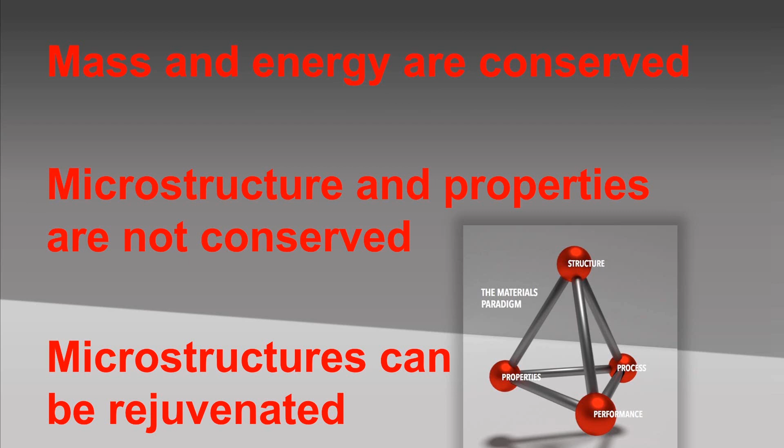Let me give you some examples for both direct and indirect sustainability effects. Direct sustainability effects refer to the reduction of emissions and energy consumption during the synthesis and manufacturing of metals. In that context, the reduction in the CO2 emissions, stemming from metallurgical processes, deserves highest attention.

A typical example is the current attempt to inject hydrogen gas into blast furnaces. The aim is to use hydrogen as reductant, so as to reduce the fraction of iron ore reduced by carbon. A future alternative is to operate so-called direct reduction furnaces entirely with hydrogen, instead of methane gas.

A second direction is the electrification of the metallurgical manufacturing chain, including, for instance, advanced electrolysis solutions. Next is the recycling of metallic scraps, and remelting them into fresh material. This requires research on advanced scrap sorting technologies, and in the future also on recycling-oriented alloy design.

Recycling-friendly alloys should be characterized, for example, by a high tolerance against undesired impurity elements that can enter through the scraps. Another aspect concerns the overall process efficiency. An example is near-net shape manufacturing, such as known for instance from thin slab or thin strip casting.

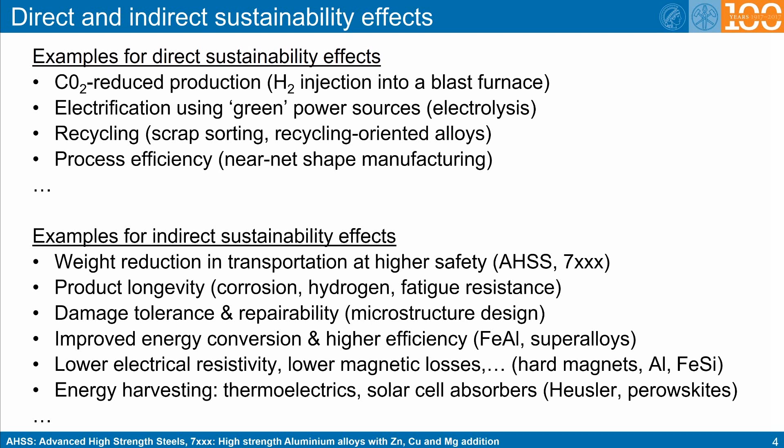An essential contribution is made by materials that can serve for energy harvesting. Examples are thermoelectric materials, and solar cell absorbers, such as for instance, Heusler phases and perovskite solar cells.

Producing electrical energy from such primary energy carriers through gas or steam turbines with high efficiency requires high temperature and corrosion-resistant alloys. When transporting the electrical power to downstream customers, mechanically strong, lightweight, and low resistivity metallic materials are needed to minimize electrical losses.

Advanced magnetic materials play a key role for enhancing the efficiency of all electrical engines and electrical transformers. When finally utilizing the electrical energy in a machine or for a specific manufacturing step, high-strength and low tribology materials are required to reduce losses that come from friction and abrasion.

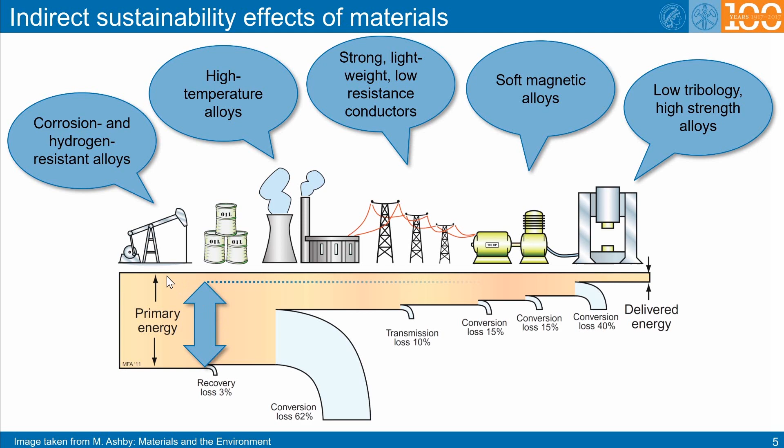Lead was a precious material at those times. It was, therefore, frequently collected, recycled, remelted, and formed into new tubes. The fact that drinking water was transported in lead tubes might have also been a cause for lead poisoning of the inhabitants of ancient Rome. This historical case, therefore, also gives an early example of an environmental crisis.

Let us now come to the contents of the lecture series. We have to start with a number of definitions in the field of sustainability. Next, I will introduce some reasons, trends, and motivation items to reveal why we have to bring our industry processes and the needs of sustainability into better accord.

After that, we discuss some of the background aspects of why greenhouse gases are so important for the global warming effect. Another important part of the lecture series will deal with the underlying markets and economical driving forces behind our current ecological crisis. In that context, it must be considered that any engineering and manufacturing measure implemented to improve sustainability also has to obey some basic economical boundary conditions, so as to make its implementation likewise sustainable.

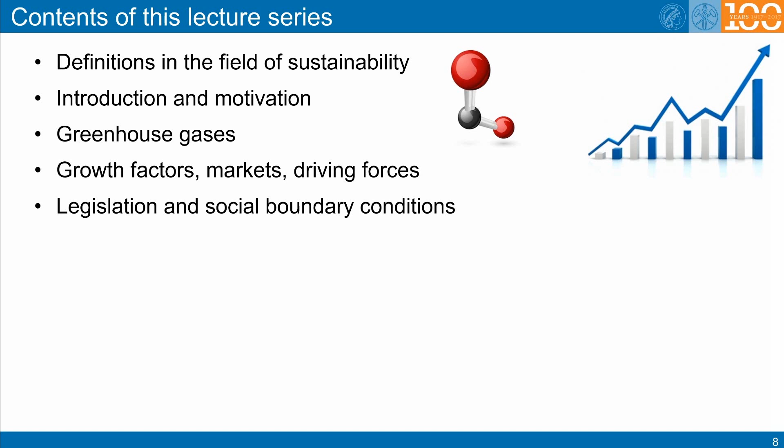Next we will discuss how to present material and energy flows in terms of the so-called Sankey diagrams. This is a very important tool in the field of sustainability analysis.

After that, we introduce life cycle assessment methods. These are essential analysis methods in this field, for investigating the balance of all input and emission items of a product, process, or service. Another part of this lecture series will deal with waste, scraps, and recycling.

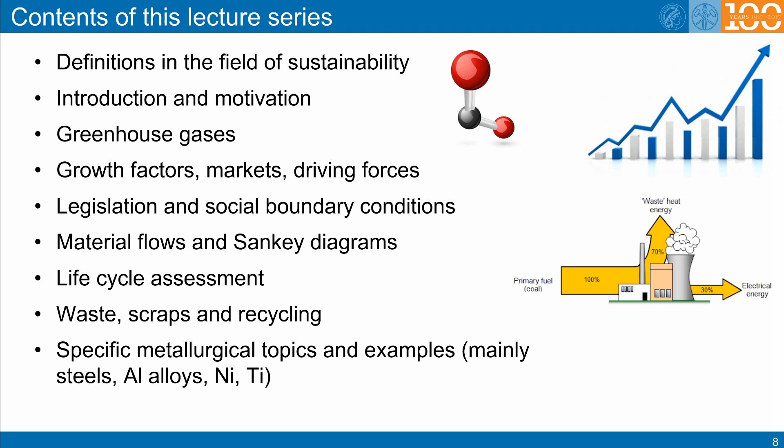Last, but not least, we will come to a number of specific metallurgical topics. In that context, we will discuss examples for current and possible future research in this field. Most of these examples come from the largest alloy groups, namely steels, aluminium, nickel, and titanium alloys.

Here we start with a few basic definitions. A very general, but also very helpful definition of sustainability has been given in the Brundtland Report in 1987. It defines sustainability as a product, process, or service that meets the needs of the present generation, without compromising the ability of future generations to meet their own needs.

Another very helpful clarification in that context is that sustainability concerns the entire life cycle of a product, process, or service construction. It reaches from the acquisition of raw materials through planning, design, construction and use, to final demolition and waste management, under consideration of all resource, emissions, and transport items.

An important aspect in the field of sustainability concerns the so-called unintended consequences. This term describes the sometimes desired, but very often undesired, outcomes of an originally purposeful action that were initially not intended. This is an effect which can sometimes be observed in cases where the side effects of certain sustainability measures have not been properly taken into account prior to implementation.

Let us now look into the different roles that science and engineering play on the one hand, and society and legislative boundary conditions on the other, in sustainable metallurgical science and engineering.

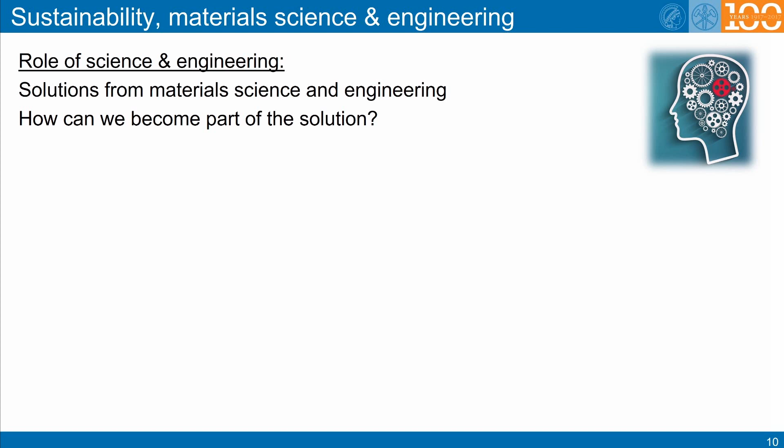In contrast to such well-defined targets, the role of society and governmental action is much more complex, diverse, and also much harder to predict.

While target quantities on the scientific side of sustainability-oriented metallurgical projects are typically very well defined, such as reaching a certain CO2 reduction of a process, or a certain energy storage capacity for a battery, or a specific strength and toughness of a steel, they are much less well defined in politics, and can sometimes even change with the next election.

Examples are legislative measures, changes in taxation, the development of local and global markets, the cost structures associated with products and processes, the public acceptance of certain sustainability measures, and public opinion in general about this field, as well as cultural differences and concerns about job safety, to name but a few aspects of these permanently moving boundary conditions.

The obvious consequence of such an imbalance in the boundary conditions is that they have to be considered in the form of appropriate bounds or probability considerations. These must then be included in careful model calculations, under close consideration of market mechanisms, detailed life cycle assessments, and avoidance of unintended consequences.

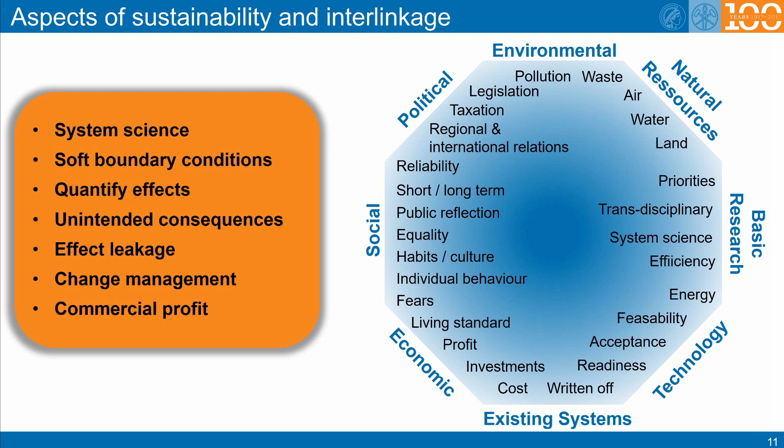A further important aspect is that change management must be practiced, especially in the case of large-scale technical measures, so that engineering measures are implemented in a structured manner. Last but not least, changes in the sustainability of manufacturing-based value chains can only be realized if at least some of the parties involved make money from these changes.

This overview of the sustainability goals for society and industry, defined by the United Nations, shows that the implementation of sustainability measures has multiple aspects to consider. In this lecture series we will mainly discuss aspects related to metallurgical industry, responsible production, and technologies for sustainable cities.

However, the UN targets for sustainability reach much beyond that, as shown on this slide, including poverty, labor, human rights, hunger, health, and education, to name but a few other essential factors.

This means that we may run in some cases into a fundamental dilemma, namely, when unintended consequences arise that improve one of these goals, but violate another. The take-home message from this slide is that measures in metallurgical sustainability should not violate other sustainability goals.

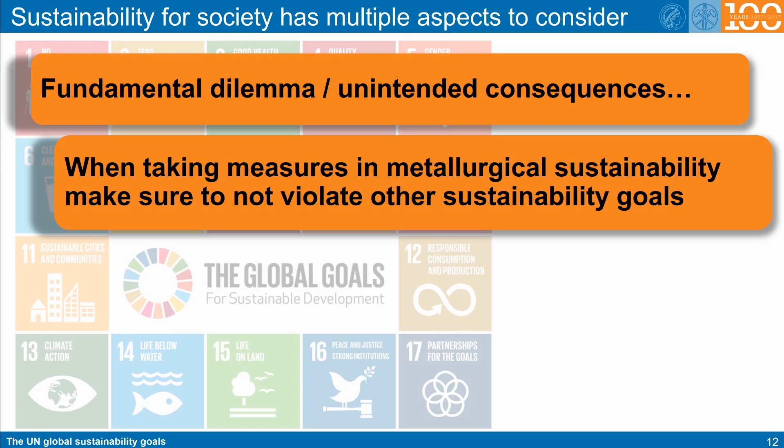Next, we come to some definitions regarding life cycle assessment. The goal of life cycle assessment is to compare the full range of environmental effects assignable to products and services by quantifying all inputs and outputs of material flows and energy consumption, and assessing how these material flows affect the environment. This means that life cycle assessment produces a model twin of the process, service, or product considered.

The model must then take all input and output quantities into account, and subject them to operational functions that mimic the targeted processes. These operational functions can be regarded analogously as the mathematical model twin of the process's digestion system. This means that life cycle assessment is a quantification tool for the total environmental impact of products, processes and services.

Particularly in the field of materials processes and metallurgical products, it evaluates the environmental burdens and benefits over the life cycle for a product, from cradle to grave, including material and energy used during extraction and processing of raw materials, manufacturing, transportation, reuse, recycling, and end-of-life disposal.

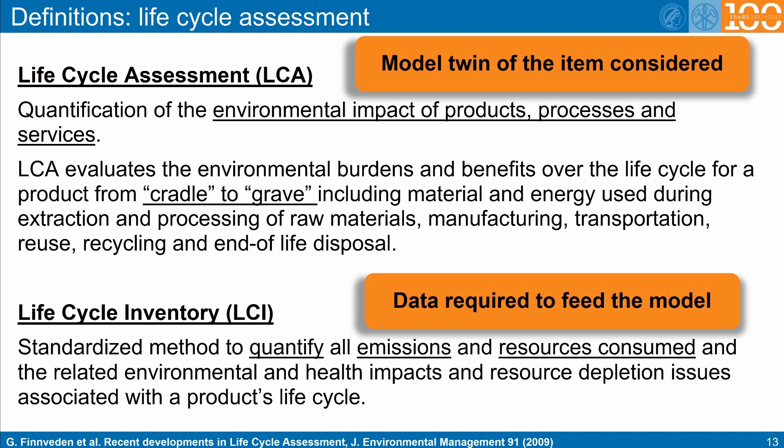This requires a solid database to feed the model. This is coded in the form of a life cycle inventory. The life cycle inventory is a standardized method to quantify emissions and consumed resources, and the related environmental and health impacts, as well as resource depletion issues associated with a product's life cycle.

This schematic sketch shows a typical example of a product life cycle and the workflow for its assessment. At the beginning are the natural resources and the material production. This step must consider the required energy, the feedstock materials consumed, all transportation means required, as well as all the emissions created during production.

Next is a typical product manufacturing step, where the same input and output quantities as well as the inbound and outbound transportation are taken into account.

After that comes the use of a product, which can sometimes extend over only a few hours or days such as in the case of packaging, or over several decades such as in the case of larger infrastructures and buildings. This product lifetime and all the energy input required for its operation, as well as all emissions created, have to be built in. The product's lifetime is an important parameter for a total life cycle assessment.

The same applies to the reliable modeling of scrap availability in future scrap markets. A simple example is that materials used in buildings enter the scrap market after many decades. In contrast, a drinking can is usually scrapped soon after its use. After recycling and the production of a new can, it can be back on the supermarket shelf within a couple of weeks. After that comes the product disposal, where similar balance considerations must be made.

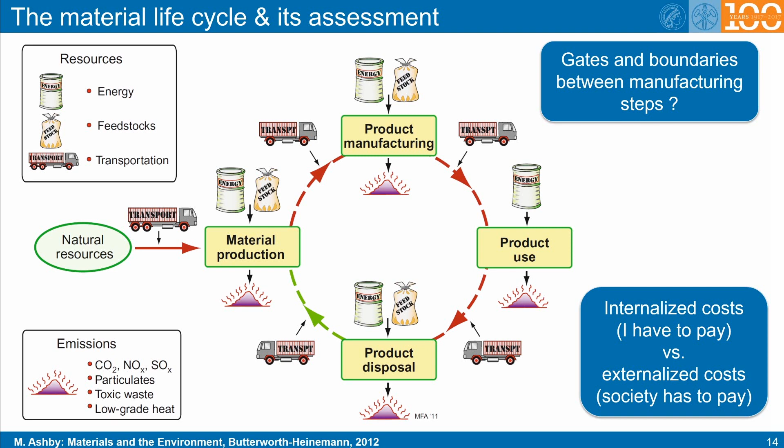This is important, because often these different steps along the life cycle are done by different companies. Therefore, stepwise life cycle assessments do not cover the complete through-process life cycle, but only individual parts of the entire chain. Such partial life cycle assessments can, therefore, provide an incorrect picture of the true environmental burden associated with a product or process. We look into this aspect in more detail on the next slide.

In other words, it must be decided if these parameters and the associated emissions, resources and costs are internalized or externalized. All these external borders have to be properly defined to make the boundaries of the life cycle assessment transparent to the markets and legislative decision makers.

Another question are the gates between the individual steps in the life cycle. As mentioned before, it matters substantially to a life cycle assessment at which level of granulation it is conducted. For instance, when considering steel as a typical product, its primary synthesis through the blast furnace and the steel plant route comes with huge CO2 emissions.

In contrast, some parts of its downstream manufacturing chain are much more sustainable, due to the often very long product use and the relatively high recycling rate, for instance in the case of expensive stainless steels. This means that certain steps of a value chain and life cycle can be, or can appear, rather sustainable, while others appear less sustainable. It is often an important task to make the connection among these steps transparent, so that the entire life cycle is properly considered when estimating the sustainability of a certain product, process, or service.

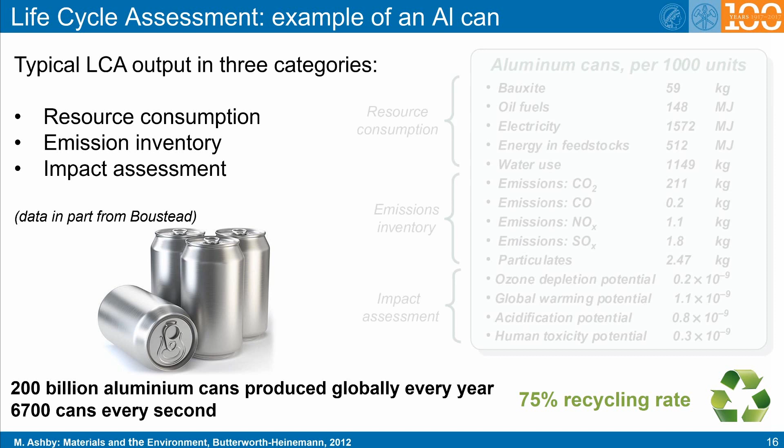It becomes apparent that particularly the huge consumption in electricity is a high burden. Actually, currently 2% of the world's energy use is spent on producing aluminium. This is due to the high enthalpy of formation of the aluminium oxide.

Also, the consumption of water is rather high. This translates on the emissions side particularly to a very high output of CO2. This fraction can of course be substantially influenced, depending on the electricity source that is being used for electrolysis during primary synthesis.

The third category lists the impact assessment, which shows how these different emissions and consumption items act on aspects, such as ozone depletion and global warming, but also on soil acidity.

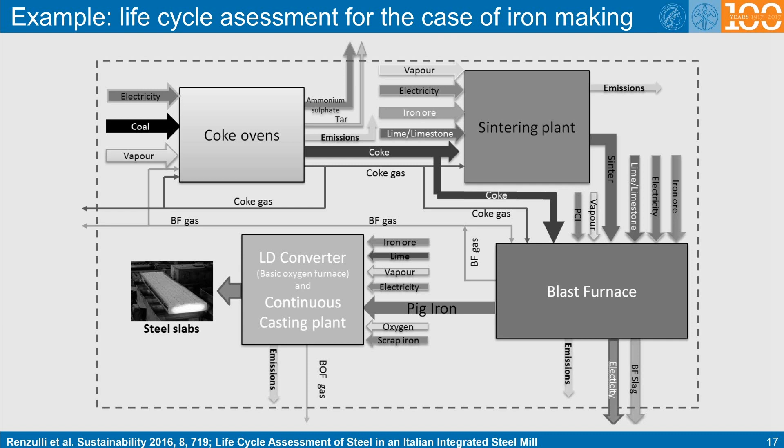Here we zoom in a bit, to reveal some of the details and exact numbers for the example of the converter plant. Besides the well-known input and output quantities, it is interesting to realize that also in the steel converter, substantial amounts of scrap iron are used.

This scrap is required for cooling the liquid material in the converter vessel down, as the oxidation of carbon produces substantial amounts of heat. In some of the current sustainability scenarios, it is considered to enhance the cooling scrap at least by a few percent, thereby reducing the amount of primary material required from the blast furnace.

On the emission side, it is apparent that particularly the CO2 production in the steel plant is very high. The reason for that is that the pig iron is essentially at the eutectic point of the iron-carbon phase diagram. This means that the pig iron, coming from the blast furnace, contains still substantial amounts of carbon. This high carbon content, which is about 4.3% at the eutectic point, must be reduced prior to casting the material into slabs.

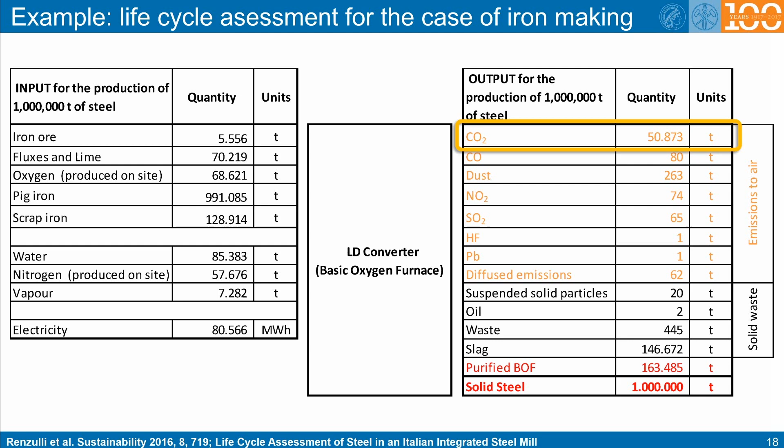This is an example for unintended consequences. The term unintended consequences refers to unplanned and often undesired side effects associated with an otherwise purposeful action. This is an effect which occurs surprisingly often in the field of sustainability.

One current topic of immense importance in the field of sustainable metallurgical science is the approach to inject hydrogen into blast furnaces, in order to reduce their CO2 emission. Since about 3,500 years, iron ores are reduced by using carbon carriers as reductants. This leads to a substantial production of CO2.

As a rule of thumb, currently about 2.1 tons of CO2 are produced per 1 ton of steel. When considering the huge amount of steel globally produced, it becomes clear why about 6.5% of all CO2 emissions on the planet come from the steel industry.

Therefore, the approach of using hydrogen as an alternative reduction gas is a very sensible approach, as the resulting emission would be just plain water.

Now, which kinds of unintended consequences might apply in such a scenario? First, water is a greenhouse gas too. However, water is not considered so harmful, as it contributes only a very small fraction compared to the water that is already in the atmosphere. Local saturation with water steam also leads to precipitation in the form of rain.

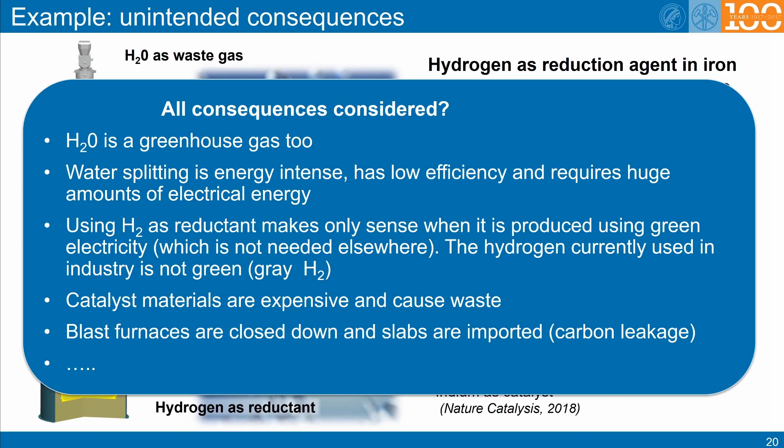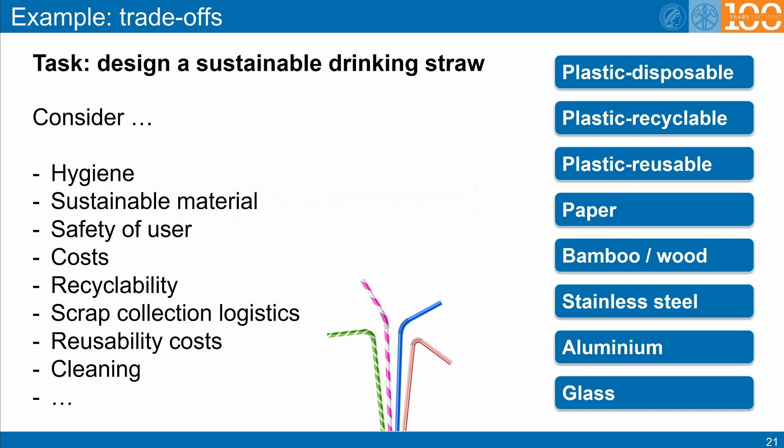This slide gives a little case study on a materials-related sustainability challenge, namely, the design of a sustainable drinking straw. Obviously, a number of issues need to be considered in that context. These are, for instance, questions related to hygiene, sustainable material choice, the safety of the user, costs, recyclability, and so on. On the right-hand side, you can see some materials popping up, which you might want to take into consideration for solving this task. If you choose to go through this exercise, you will experience how challenging a life cycle assessment for such an allegedly simple product, its use, and its recycling can be.

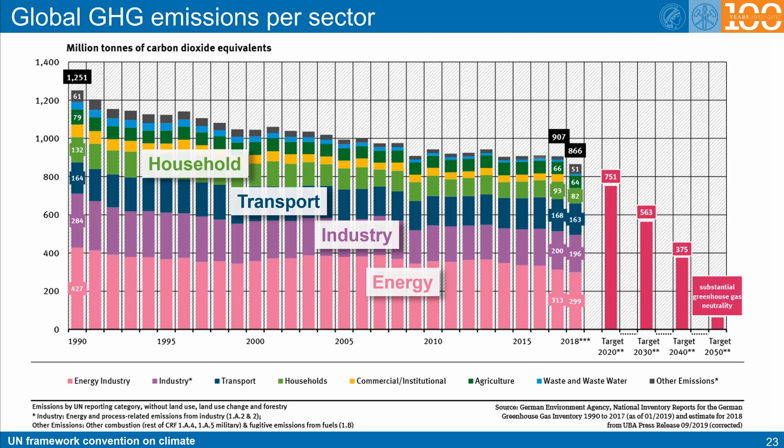The second take-home item is that the huge emissions that are caused by these sectors can all be substantially influenced by the types of materials that are used in these fields, and by the way how these materials are produced. In other words, the field of metallurgy has a huge leverage on the emissions for these sectors.

It must be understood that even very small improvements, for instance in creep-resistant high-temperature materials, high-strength materials, or improved corrosion resistance of engineering alloys, can have profound positive influence on reducing energy consumption and greenhouse gas emissions in these sectors, simply due to the enormous magnitude of these sectors and the resulting high leverage effects. In other words, small progress in materials science can have a big effect on improved sustainability.

The third, and rather dramatic take-home message from this diagram, is the huge reduction in greenhouse gas emissions that is required when aiming at fulfilling the targets of the United Nations Framework Convention on Climate Change by 2050. Let us translate some of these statistics into a few key figures.

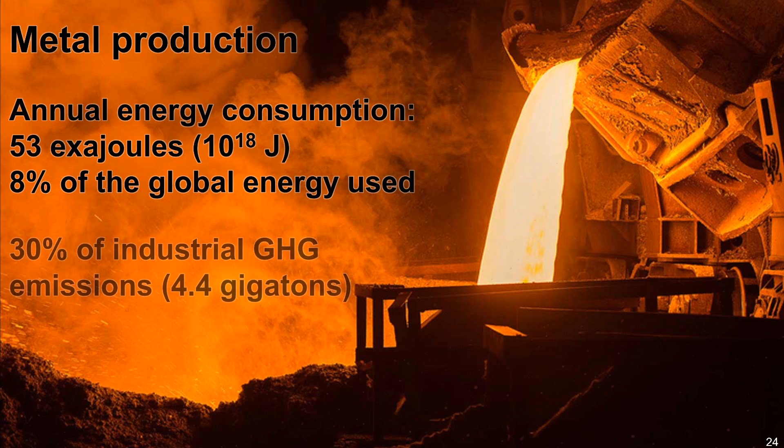They show that even small improvements in the primary production of metals can have huge impact on the total energy consumption of this sector. Metallurgy amounts to about 53 exajoules of energy consumption. This translates to 8% of the total energy that is consumed globally. The second number to memorize is that about 30% of all industrial greenhouse gas emissions come from the metallic sector. They make up 4.4 gigatons of greenhouse gas, mostly CO2.

This is a slide about the embodied energy of metals. Let us take the reduction of the most important iron ore, hematite, into pure iron as an example. A standard thermodynamic database teaches us that the minimum amount of energy required for the reduction of hematite into iron is 6.1 megajoules per kilogram. This is the free energy of oxidation of iron to this oxide.

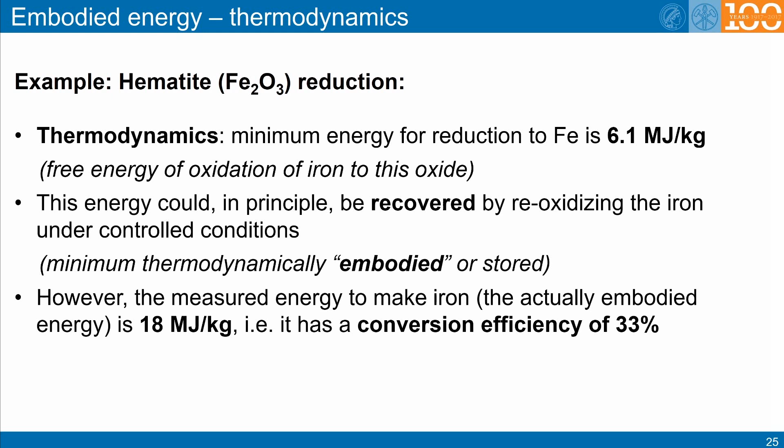This energy could, in principle, be recovered by reoxidizing the iron under controlled conditions. This means that it is the minimum thermodynamically embodied or stored energy. However, the measured energy to make iron, that is, the actually embodied energy, amounts to 18 megajoules per kilogram. This means that the production of iron from its ore has a conversion efficiency of only 33%, compared to its ideal thermodynamically embodied energy. The obvious question is, where does so much energy get lost during production?

In the full lecture that will be given in the coming lecture series about this topic, we will see that most is lost as waste heat in the blast furnace process. The conversion efficiency is even much worse for most of the other metals.

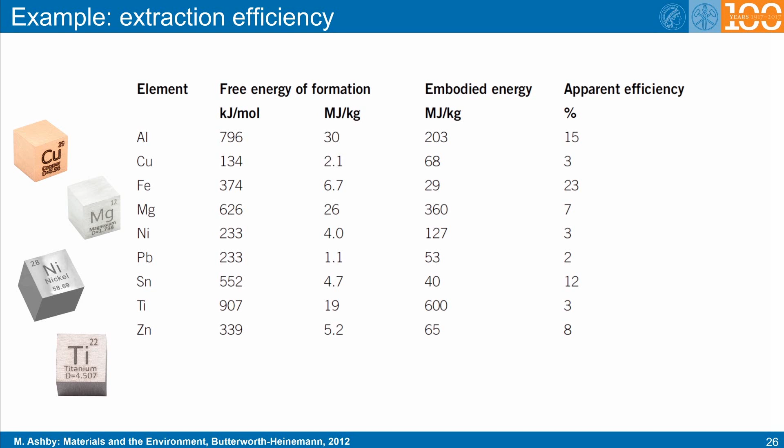This slide shows the embodied energy and the extraction efficiency for a number of metals. We learn that for aluminium and for iron, the apparent efficiency, compared to the free energy of formation of the ore, that is, the thermodynamically embodied energy, is still relatively decent, relative to the other metals shown in this table. The number of 23% shown here for the apparent efficiency of the synthesis of iron is even smaller than the one given on the preceding slide for the case of hematite.

This deviation is due to the fact that the number shown on this page averages over both types of ores that are used for making iron, namely hematite and magnetite. It is indeed staggering to see how small the efficiency of metallurgical synthesis is, relative to the thermodynamically embodied energy value for most metals. This observation also reveals that there is a lot of headroom left for further research in the field of metallurgical sustainability.

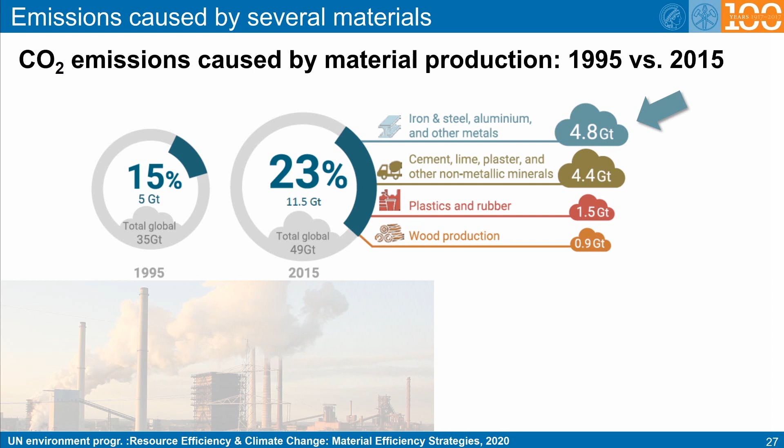Here we see a comparison of the emissions that are caused by several types of materials. It does not only reveal that the metallurgical sector contributes more to the CO2 emissions than the other material classes, but it also shows the enormous increase in the emissions between 1995 and 2015.

As a take-home message, it can be memorized here that the current CO2 production for making 1 ton of liquid steel is about 2.1 tons. This number holds true for the current production via the blast furnace and the conventional steel plant route.

In the case that the iron ore reduction is done exclusively by hydrogen, and the so-produced iron sponge is thereafter melted in an electric arc furnace, this leaves us with about 1.1 tons of CO2 for 1 ton of liquid steel. This can be seen as a lower bound for steel production during the next decade.

Further reduction of the CO2 balance could be achieved when only green energy sources were used for operating the electric arc furnaces, and if the huge graphite electrodes that are currently used in these furnaces could be replaced by inert electrode materials.

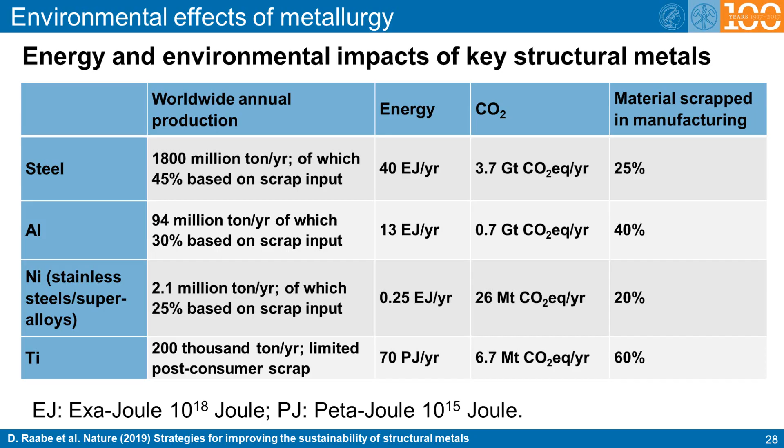Therefore, a reasonable forecast may assume an increase in the current consumption of metallurgical products by a factor of 2, to get a robust projection for the year 2100. Such calculations are not only important to predict the future consumption of metals and products made from them, but also to predict the development of the international scrap markets, as an important source for products that can be made of recycled material.

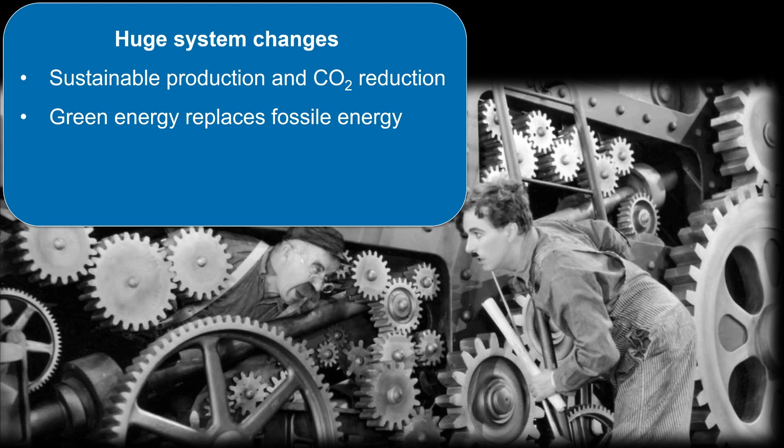The simple reason for this is that massive CO2 reductions in the metallurgical industries depend on the availability of sustainable electricity. Think of aluminium electrolysis, or of electric arc furnaces for melting iron sponge that has been made from hydrogen-based direct reduction plants. Without the vast availability of green energy, these measures do not make much sense.

This refers to the next ongoing revolution, namely, electrification of transport and manufacturing processes. The last one is the digitalization and the use of artificial intelligence in modern industries. Only a complete digital twin of metallurgical manufacturing value chains allows us to identify those measures where substantial leverage can be achieved in reducing the energy consumption and greenhouse gas production. It is obvious that these four revolutions are very closely interlinked.

Let us next look at some of the biggest markets that drive the metallurgical production. Here we first look at the global market for light vehicles. The diagram shows the high growth rates in this field, and it also reveals the fact that we currently sell an incredible number of about 100 million cars every year. This translates roughly to a total value of 2,000 billion euros per year. In total, we have about 1.3 billion cars on our streets already today, with 50 million units alone in Germany.

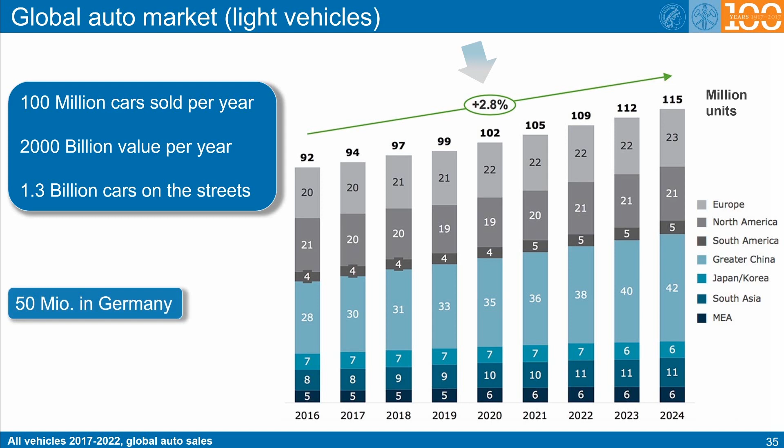This becomes clear when you take a quick look at the ecological fingerprint of the global Internet. The use of the Internet and its many associated services has meanwhile reached similar energy and CO2 emission numbers as the total global air traffic.

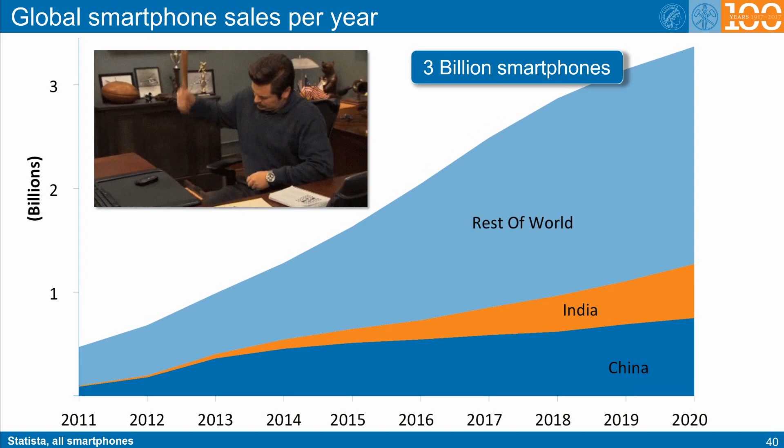One of the main questions in sustainable metallurgy is, what happens with these phones if we do not use them anymore? These phones produce obviously a correspondingly huge pile of electronic scrap every year.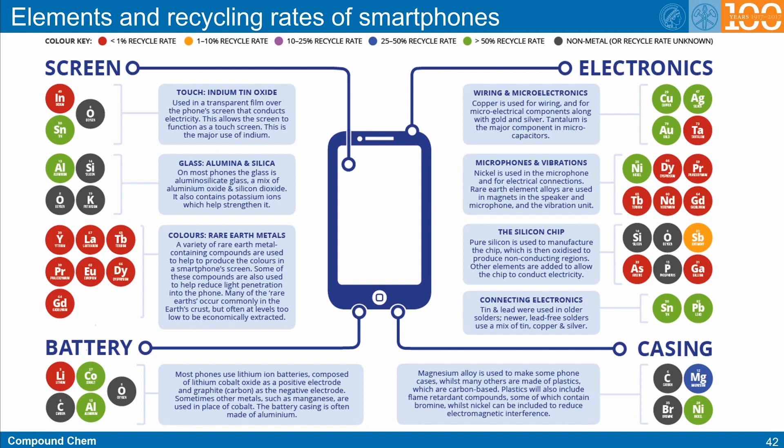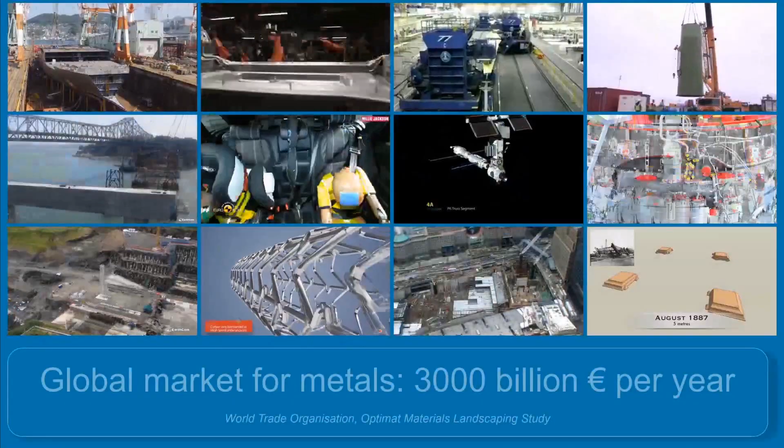While large quantities of steel are used in the automotive, manufacturing, and mechanical engineering industries, by far the highest fraction, more than 50%, goes into huge construction and infrastructure applications. Very similar trends apply also to aluminium and other metallic materials, such as nickel or titanium alloys. The total global market for metals amounts to the incredible number of 3,000 billion euros per year.

On the next slides we look into some Sankey diagrams for four important metallic materials. A Sankey diagram is a type of flow figure in which the width of the arrows and connection lines is proportional to the flow rate of quantities such as material or energy. The following illustrations show Sankey diagrams representing all the material flows associated with the production, use, and waste of steel, aluminium, nickel, and titanium.

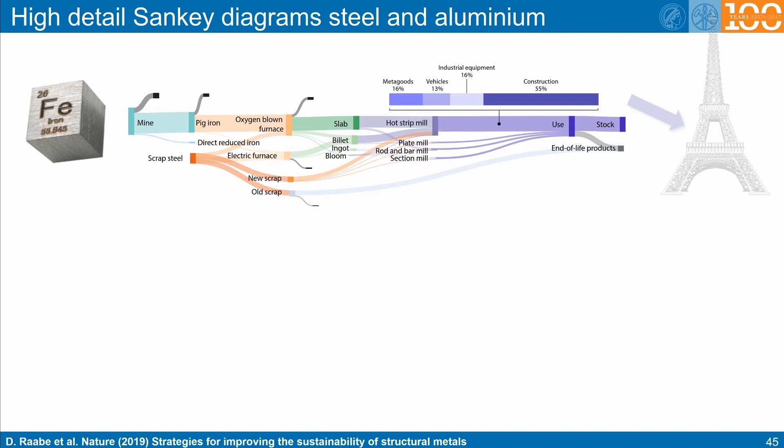The first example shows the flows for steel, from the mined ores to the final stock and scrap. It reveals not only the huge amounts of ores consumed for steel making, but also the secondary synthesis where new steels are melted from scraps in electric arc furnaces and fed back into the market. The use bar also shows that more than half of all steel goes into construction.

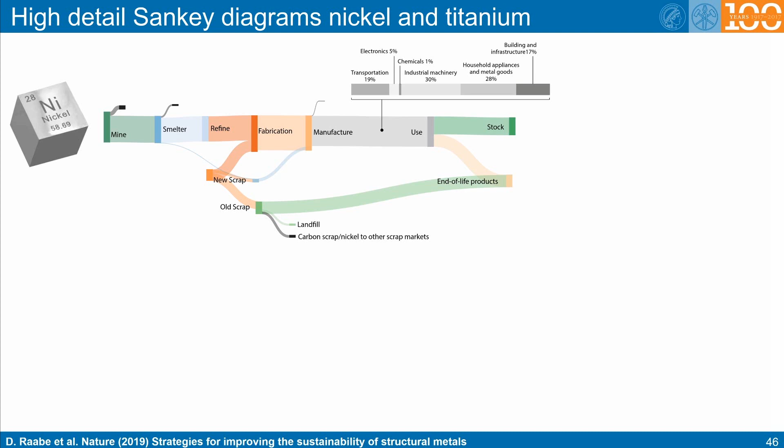For the case of nickel, the Sankey diagram shows a high fraction of scrap produced during fabrication. It also reveals a high contribution from old scrap, coming from end-of-life products, which can be injected back into fabrication. Most of the nickel is used in stainless steels, as reflected by the product portfolio where it is mostly used, namely in household appliances and industrial machinery.

Nickel-containing products, such as stainless steels, are very durable and serve in parts and equipment designed for long-term use. This means that nickel-containing products have a certain inherent sustainability due to their longevity, as the best scrap is the scrap that is avoided.

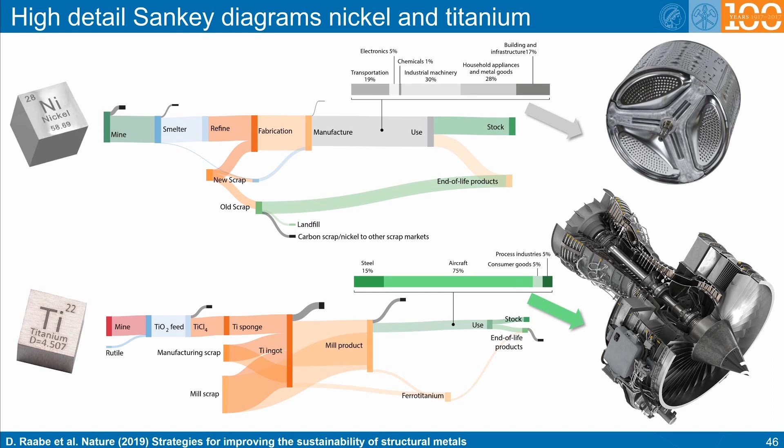One basic question is whether we have too many different types of alloys, with too many different chemical compositions. We are nowadays regularly using more than 2,000 different types of metallic alloys, many of which have quite different composition. This makes scrap sorting much more challenging, particularly when considering post-consumer scrap, where everything is mixed together. This leads to substantial downgrading in material quality and downstream recyclability.

In contrast to the approach of designing and adjusting alloys and properties primarily through their chemical composition, the possibly biggest success story of modern metallurgy is the understanding that many properties, particularly the mechanical properties, can instead be very well realized through the adjustment and tuning of the microstructure. This also points back to our initial statement, namely, that the microstructure is not a conserved quantity, and can be substantially influenced by processing, in a way to alter for instance the mechanical properties over several orders of magnitude.

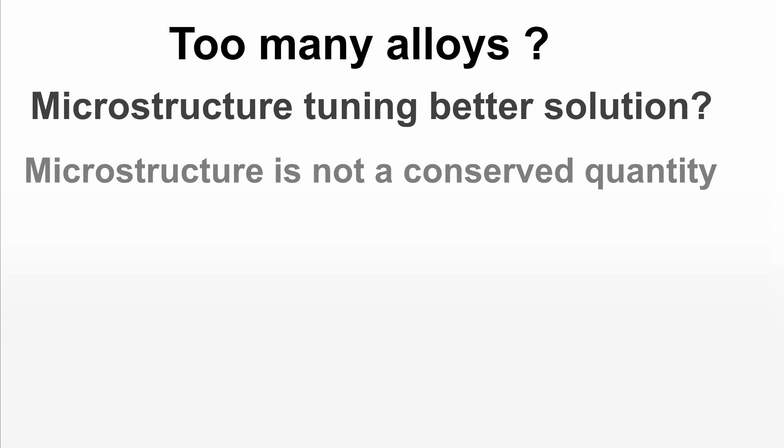The most famous and probably most successful material in that context is steel. Based on a small range of very simple chemical compositions, including for instance iron, carbon, and manganese, a surprisingly huge variety of microstructures and properties can be realized, serving in more than several hundred quite different types of steels. As an example, a bulk iron single crystal can be as soft as 30 to 40 megapascals, while heavily wire-drawn pearlitic steel can be as strong as 7 gigapascals.

Interestingly, a similar variation of properties applies also for many natural materials, such as wood, which yields a huge variety in mechanical response while essentially using the same chemical ingredients and building units, realized mainly through the adjustment of its hierarchical structural organization.

This poses an immense burden for the recycling industry, because mass is a conserved quantity, and many of these elements are very rare, and in part extremely expensive. Yet, due to this enormous variety of elements used in the same material and product, it is increasingly difficult, or even impossible, to separate them from each other, when the product has reached the end of its life. This intense mixing of elements is also due to the fact that we can nowadays design, manipulate, and manufacture materials at dimensions that reach down to the nanoscale.

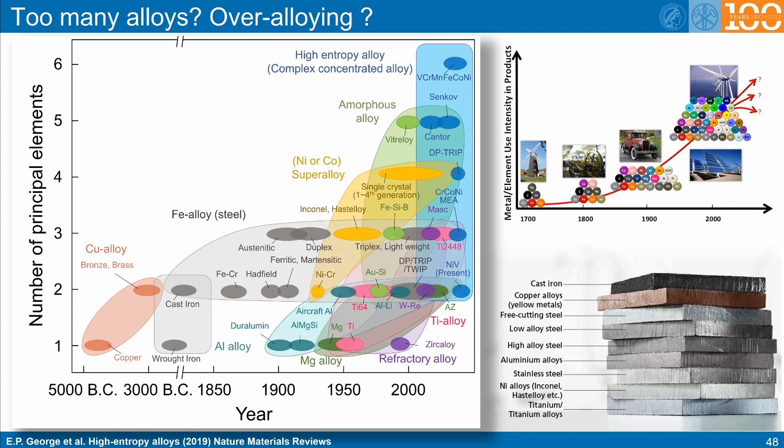Alloys of the 5000 series are essentially blended with magnesium, while those of the 6000 series use both magnesium and silicon as alloy ingredients. These two types of alloys are primarily used in the automotive sector, as well as in mobile phones and laptops. The high-strength alloys of the 2000 series use copper as primary alloying element. These materials serve mostly in the aerospace industry.

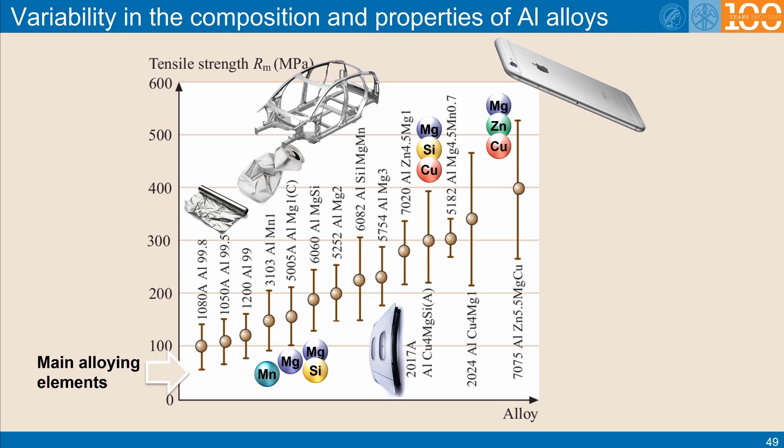Even higher strength levels can be achieved when doping aluminium with copper, zinc, and magnesium. Alloys of this type are gaining momentum in the automotive sector. This means that, from left to right, most of the strength increase is obtained by adjusting the chemical composition, together with the corresponding heat treatment that is required, to achieve the desired nanoprecipitation state.

What is interesting in this diagram, is that for some of the high-strength materials, a broad variety in tensile strength can be obtained by different heat treatments alone. These lead to different nanoprecipitation states in alloys that have essentially the same, or very similar, chemical composition.

Urban mining refers to the process of reclaiming compounds and elements from products, buildings, and waste that would have to be otherwise mined and enriched by traditional mining methods, a field that is often associated with a substantial environmental burden.

Let us look at the example of rare earth elements. These metals are important in producing multiple goods that people want, for instance in the form of magnets, electronics, batteries, solar panels, or lasers. However, mining these rare earth metals from the earth can, ironically, be very detrimental to the environment. As the push for green technology accelerates, the challenge of obtaining rare earth metals without becoming an environmental problem itself will require creative solutions.

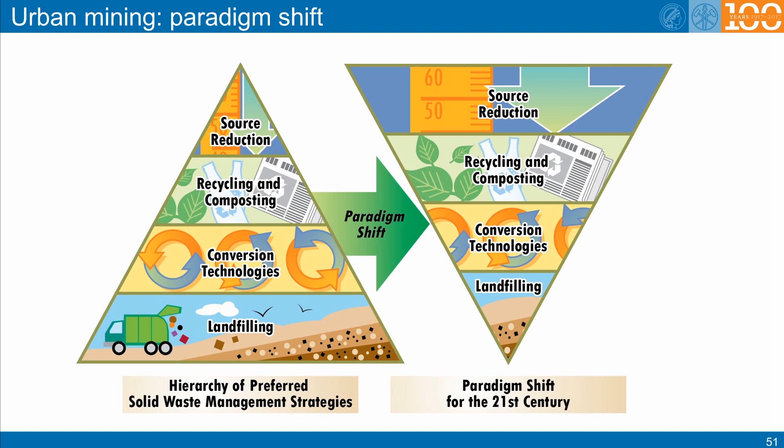The most rapidly growing source for urban mining of rare and expensive elements is electronic and electrical waste. It stems from computers, television sets, mobile phones, and household appliances, which implies that it mostly occurs as post-consumer scrap, mixed with other types of waste. Most of this highly precious material is ending up as landfill. When such electrical and electronic waste can be separated from other waste streams, it represents a very valuable source for urban mining.

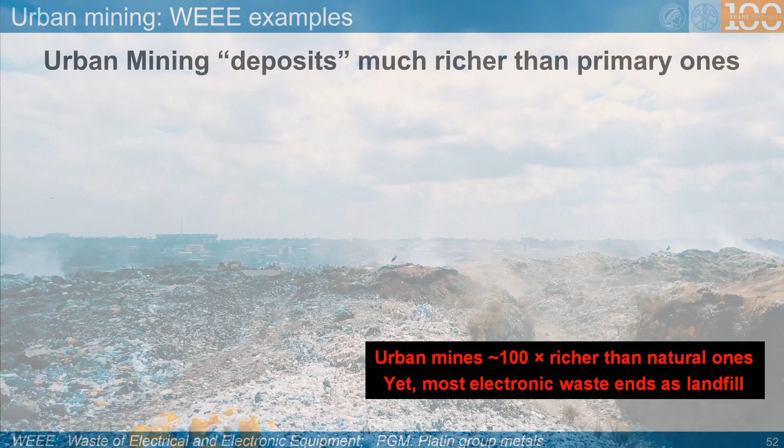As an example, mining gold from classical ore deposits yields about 5 grams of gold per ton of ore. The value is very similar for the platinum group metals, which are essential for instance for green chemistry, as most catalysts are made of these elements. In contrast, the yield in urban mining can be up to 300 grams of gold per ton of electronic scrap, for instance, when retrieved from old cell phones. The numbers are equally high, or even higher, for different types of electronic products.

Particularly in the electrification of industry and transportation, as well as in green energy harvesting, substantial unintended consequences can apply when obtaining the materials and elements that are needed in this field. To be specific, more than 3 billion tons of minerals and metals are required to deploy wind, solar and geothermal power to an extent that enables us to keep global warming below 2 degrees centigrade. This means that while sunshine and wind are clean, the infrastructure that is urgently needed to capture it is not.

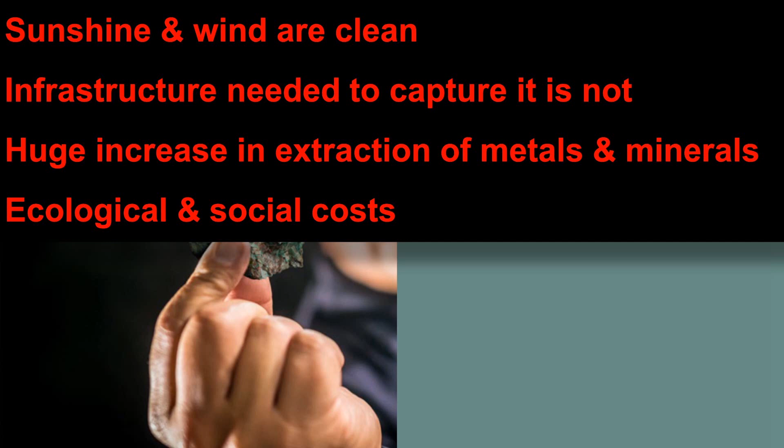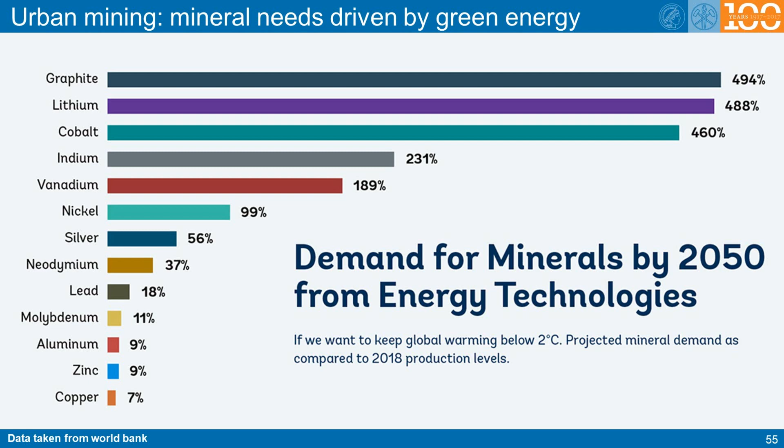The huge increase in extraction of metals and minerals needed for tapping green energy sources comes at a very high ecological and social burden, which must be properly understood and mitigated by implementing adequate engineering solutions. This diagram shows, for some of the minerals that are urgently needed for making our energy supply and infrastructures more sustainable, the projected growth rates until the year 2050. It shows that the demand for some of these materials will grow by the incredible amount of 500%.

This means that sustainable approaches must be identified, for the mining and the synthesis of these materials, but also for more closed-loop recycling and retrieval of material from urban mining.

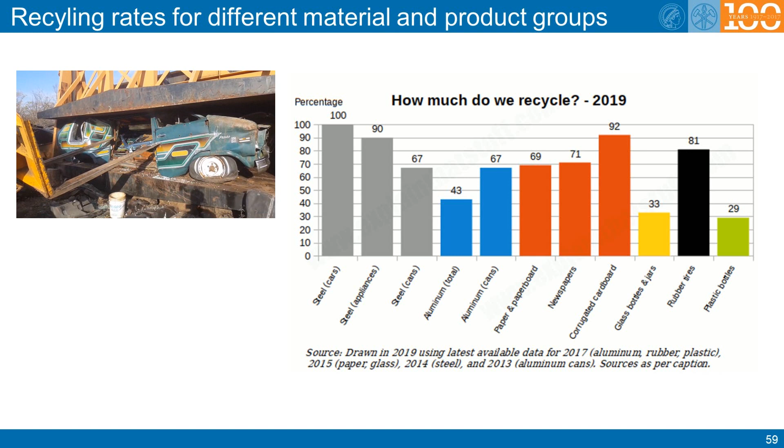This diagram shows differences among recycling rates for different material and product groups. The recycling rates for steels are rather high. This applies traditionally for steel from scrap cars, and for stainless steels coming from household appliances. For aluminium, the recycling rates are quite different for different product types. While 2/3 of all beverage aluminium cans are recycled, the total recycling rate, averaged over all aluminium products, is only about 40%. The lowest recycling rates are observed for polymer bottles.

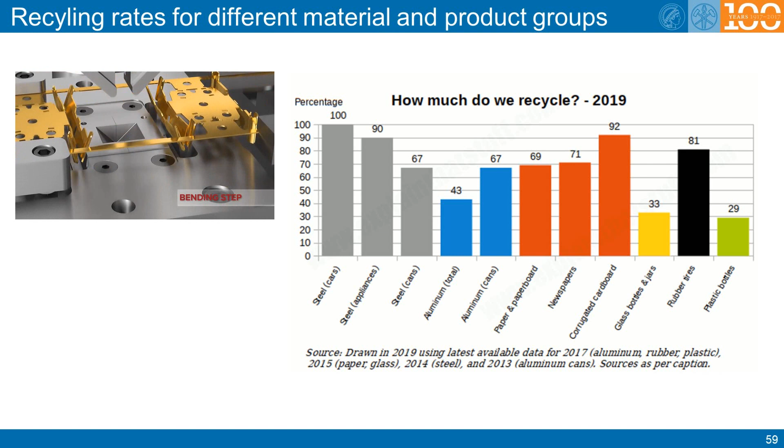This diagram teaches us that we have to develop recycling rates in closed loops, pertaining to specific product and alloy groups, with early-stage separation of different types of alloys. The most efficient type of recycling is the collection of specific alloys directly during manufacturing.

This will be discussed in greater detail in the following classes. We will then also discuss the requirement that future products must be upfront developed in a way to allow for efficient disassembly and separation of the different materials.

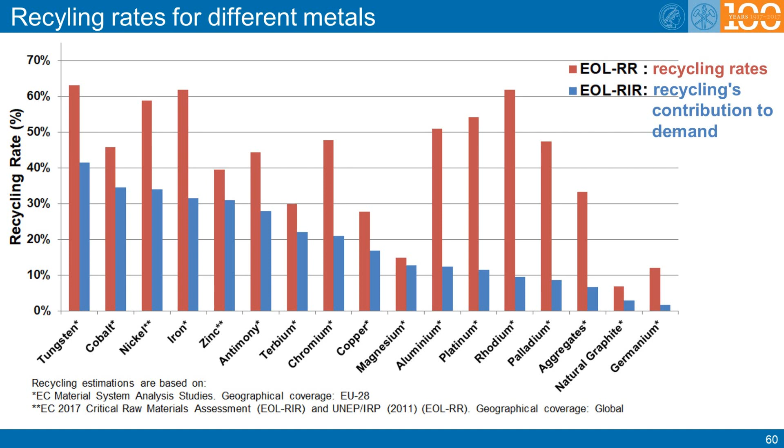This shows that high efficiency of the recycling industries in the European Union in recovering materials from end-of-life products alone does not always correspond to a proportional contribution in terms of increased resource security. This means we need to also develop sustainable methods of mining and primary synthesis of new material. It should also be highlighted that many raw materials are contained in long-use societal stocks, entering the recycling loop only after a long period, sometimes decades.

An interesting question is what the driving forces are for developing sustainable products, processes, or services. Recently, the consumer has gotten more sensitive about the sustainability of products, although price still plays the leading role for customer decisions. This applies particularly for customers with low or average income, who can often not afford paying a higher price for more sustainable products. This is a challenge, where state legislation and taxation measures can come into play, for instance through lower taxes or financial benefits, to encourage customer decisions for sustainable products.

In some cases, companies anticipate legislative decisions and develop more sustainable products of their own, such as in the case of banning lead-containing products from solder wires.

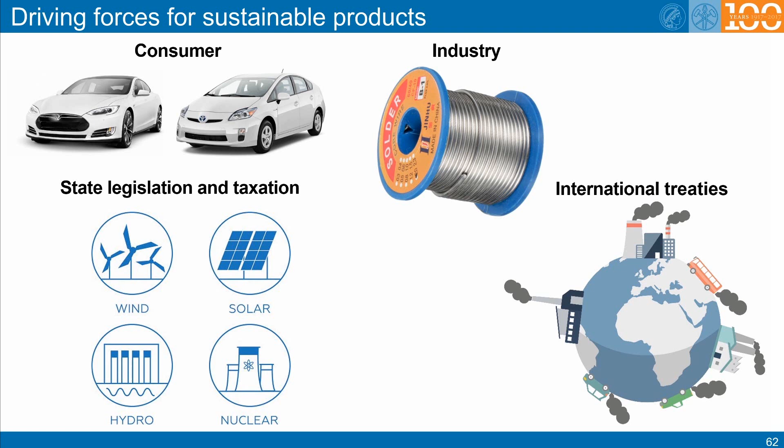Another main factor for pushing governments to take measures for rendering industry and products more sustainable are international treaties, such as the Kyoto or the Paris Protocols.

A classical example where green branding works, due to the high recycling rates, are aluminium cans. After scrapping and collecting them, they can be back in the supermarket already after several weeks.

The energy that is saved by using scrap aluminium, instead of primary aluminium, is about as high as the energy of the gasoline that would fill the can.

A more long-term and more general challenge is to develop a broad range of products and processes that can benefit from green branding, even if the product price exceeds that of a less sustainable competing product. As an example, in the food industry, this has been achieved to some extent.

The organic food and beverage market is expected to reach a volume of about €330 billion by the year 2022, with an annual growth rate of about 16%. The images show some examples of products which use green branding.

In all such cases, it must be carefully checked and controlled, for instance by using life cycle analysis, whether the green branding is justified or not. Products sold under this notion, without being truly sustainable, are referred to as greenwashed products. The classes that come later in this lecture series will provide you with the tools and understanding to conduct such analysis and design products that are truly sustainable.

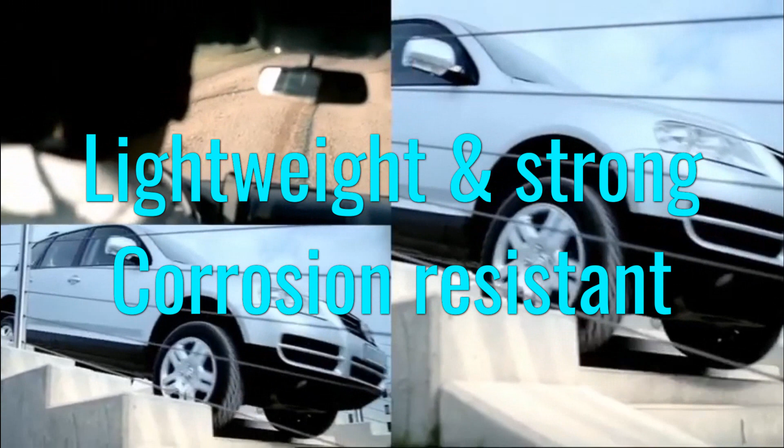It serves in many applications where low weight and high strength are required. Aluminium is very corrosion resistant, due to the thin and dense oxide layer formed on its surface. Its melting point is very low, only 660 degrees centigrade.

This means that melting aluminium scraps into new material comes at very low energy costs, only 5% of what is used for its primary synthesis. However, aluminium alloys are also very composition sensitive, and retrieve their good mechanical properties from a complex set of nanoprecipitates. Therefore, aluminium alloys should not be mixed, but require very good scrap separation prior to recycling.

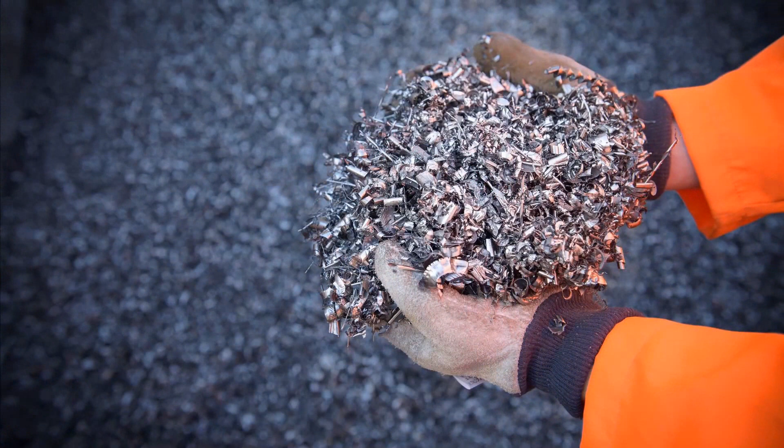The most important feature of aluminium alloys, regarding sustainability, is the high difference between the energy consumed for primary and secondary synthesis. The term secondary synthesis refers here to the remelting of aluminium from scraps.

While primary synthesis, through electrolysis, costs 45 kWh per kilogram of metal produced, the melting of scrap into new material costs only 2.8 kWh per kilogram.

Another factor making a huge difference in the material's sustainability is whether the electrical energy for the primary synthesis comes from sustainable sources or from fossil fuels. Since aluminium alloys are highly sensitive to composition changes, aluminium scrap sorting is one of the most essential tasks in secondary synthesis.

Mixing different aluminium alloys can lead to the formation of large and blocky intermetallic particles that form during solidification, and make the material brittle and susceptible to failure. Another important aspect in the context of secondary synthesis is the limited availability of certain high-quality scraps on the one hand, and some less desired scrap types in the recycling loop, such as certain cast alloys, on the other hand.

This comparison analyzes the carbon footprint of an aluminium drinking can. The color bar gives the carbon footprint in grams of CO2, embodied in a 330 ml sized can. The range between minimum and maximum depends on the specific origin of the fossil fuels that were used during production.

An aluminium can that uses less than 50% of recycled material, and correspondingly more than 50% of primary aluminium, produced by using fossil fuels for electrolysis, has indeed a very high carbon footprint.

The smallest carbon footprint applies when a high content of recycled material is used, with only minimum input of primary aluminium, and when most of the cans are recycled into new ones. Also, the use of renewable energies strongly reduces the carbon footprint of such a product.

The main take-home message of this slide is that not certain products are sustainable or non-sustainable, but the product's sustainability depends to a great deal on the origin of the energy, and the raw materials that are used to manufacture it, and its end-of-use recycling rate.

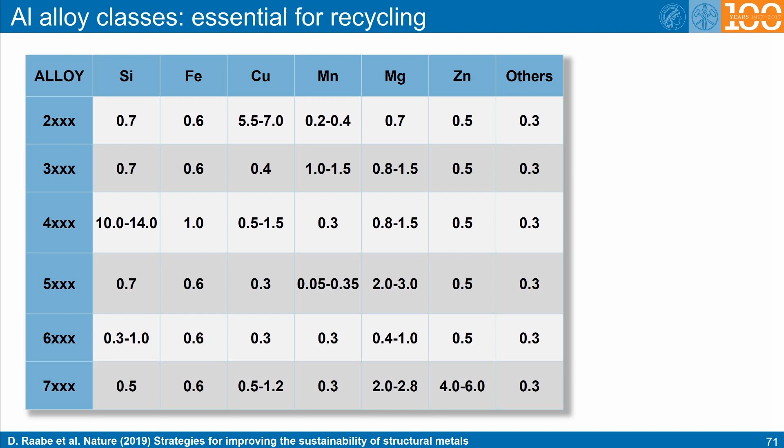A high silicon content of up to 14 weight % is commonly used for cast products, since the silicon compensates the thermal shrinkage of the aluminium and enhances castability. Huge quantities of such alloys serve in automotive engine blocks.

However, with the transition of mobility from gasoline to electrical engines, they are no longer used, and new products or alloys must be invented to consume such sort of scrap, which will enter the market during the next 15 years. It must be emphasized that such a high silicon content cannot be tolerated in any of the existing wrought alloys.

A similar situation applies for the 2000 series alloys with high copper content. This element lends the material very high strength, but it is undesired in most other aluminium alloys.

Iron is another element that enters through the scrap and through the recycling of cast alloys, but it is undesired in most wrought alloys, such as the 5000 and 6000 series materials, as it promotes formation of brittle intermetallics.

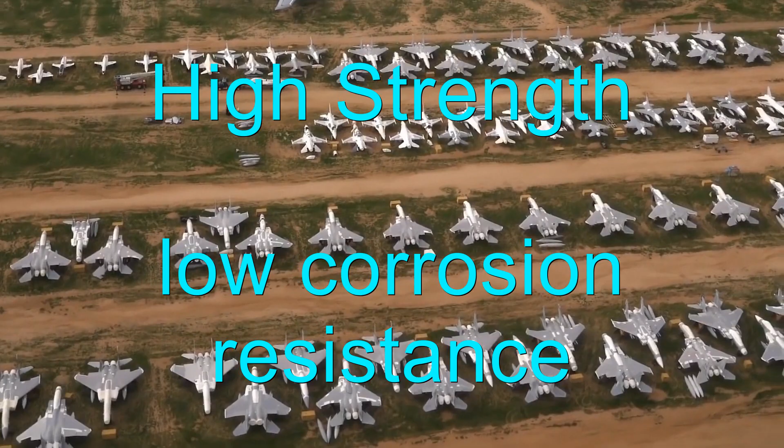Aluminium alloys with high copper content are the most widely used heat-treatable alloys for aircraft materials, mainly due to their high strength-to-weight ratio. However, the copper-rich precipitations, particularly aluminium-2-copper intermetallics, and their spinodal precursors, which strengthen these materials, have negative effects on their corrosion properties.

Hence, scrap entering the market from aerospace products is typically undesired when making new aluminium alloys.

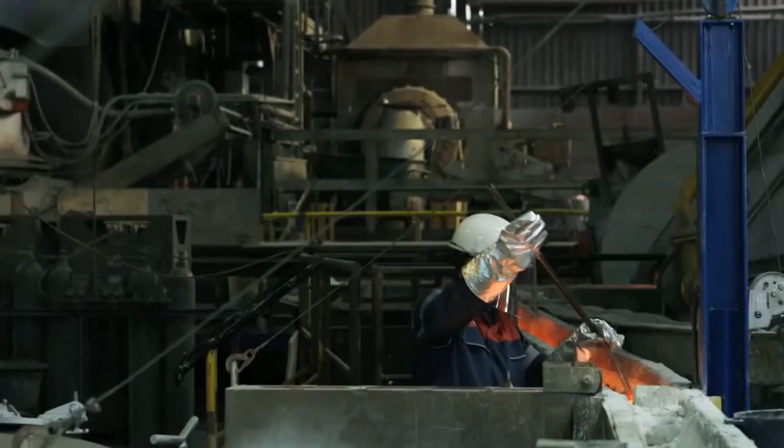An interesting concept is to let the liquid aluminium not cool down before shipping it to customers, where it has to be melted again for continuous casting, but instead bring the liquid material directly to the customer. This does not only save the energy required for reheating, but the liquid metal serves also as a buffer medium for storing energy.

The operation of the electrolysis, for reducing the metal, can be done in a flexible way, buying traded electrical power when it is inexpensive, such as at nights and weekends.

In such a business concept, where liquid metal is transported on public highways, safety is of course an important issue.

This graph shows the global demand of aluminium, highlighted in terms of two categories, namely, aluminium made from primary production, and remelting of scrap aluminium. The data show that only about a third of the aluminium is recycled from scrap.

Therefore, research in this field aims at increasing the total recycling rate of aluminium. This requires to not only think in established alloy classes, but also about new alloy concepts that combine different aluminium classes and their respective alloying elements. Such materials that combine established types of aluminium alloys with the aim to make them more tolerant against tramp elements intruding from scraps are referred to as crossover alloys or uni-alloys.

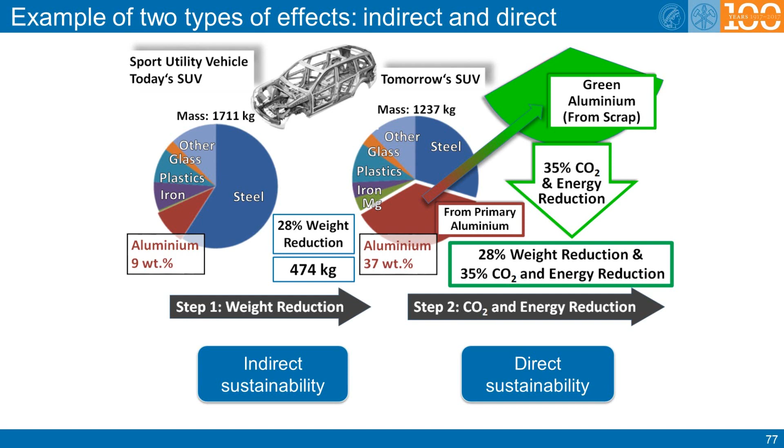A second step can be taken by improving also the construction's direct sustainability. This means that for all the materials used for the body-in-white, more sustainable production and manufacturing can be used. For the case of aluminium, an amount of 35% CO2 and energy reduction can be achieved when using recycled aluminium made from scrap, instead of aluminium alloys made from conventional primary production.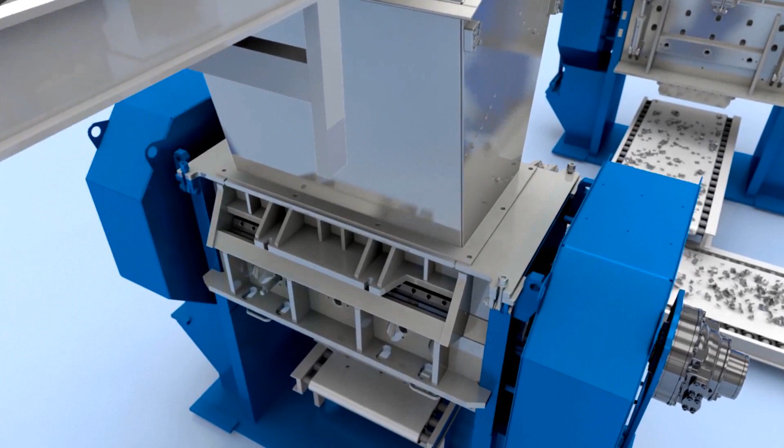Let us look closer at the recycling of aluminium alloys. These materials can usually not be mixed among the different grades, but must be carefully sorted prior to remelting. This is due to the fact that current aluminium alloys are highly optimized for strength, ductility, surface appearance, corrosion, toughness and formability, to name but a few key features.

When blending undesired tramp elements into such established alloy grades, some of these properties can substantially worsen, for example, through the change of the precipitation kinetics, segregation, the formation of undesired and large intermetallic phases, or changes in the precipitation-free zones that surround the decorated grain boundaries.

The best way to get clean scrap is closed-loop recycling, where the scrap is directly collected during production and manufacturing. In such cases the scrap collected is well defined and can be directly melted again. A large fraction of the aluminium scrap, however, is post-consumer scrap, which is mixed.

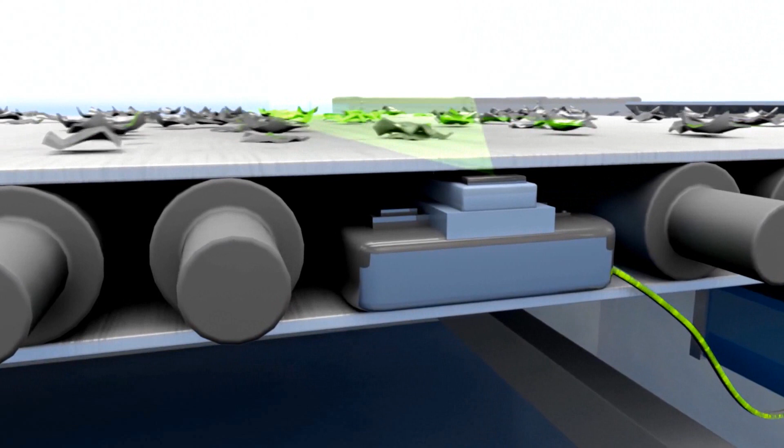In such cases, X-ray and plasma-assisted chemical online analysis methods can be used to classify alloys with respect to their prevalent alloying elements, such as manganese, copper, iron, or zinc. As the results obtained from the online chemical analysis are in the form of complex spectra, advanced machine learning techniques are increasingly used for the identification of the alloy encountered.

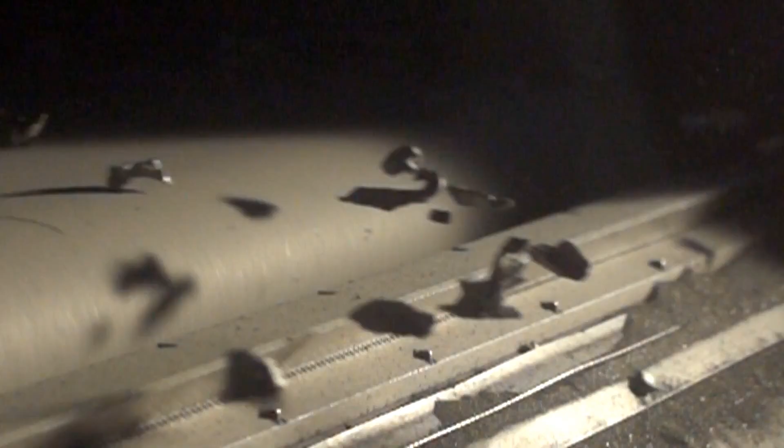Combining this online analysis with fast computer monitoring, optical particle detection and tracking, and a mechanical sorting system, allows assigning and sorting scrap particles to specific aluminium alloy classes. Details of these recent advanced recycling and sorting techniques will be the subject of a full class in this lecture series.

This movie gives an example from a research project on impurity-tolerant aluminium alloys. It shows data from a tomographic atom probe measurement, conducted on a 3000 series manganese-containing aluminium alloy, used for drinking cans. Atom probe tomography is a method that allows measuring the chemical composition of complex materials at the near atomic scale. It works by combining ionization and field evaporation of atoms from tip-shaped sample surfaces under high electrical fields, combined with mass-to-charge flight spectrometry and a position-sensitive microchannel plate detector.

The data show that besides the nominal alloying elements, such as about 1% manganese, 1% magnesium and a bit more than 0.1% copper, a number of further elements accumulate over the multiple recycling and remelting cycles it has been going through. It is therefore an important question in current research to understand how many and how much of these tramp elements can be tolerated in recycled aluminium alloys. A further question is whether alloys can be developed that are upfront designed for high impurity tolerance and hence for high scrap usage.

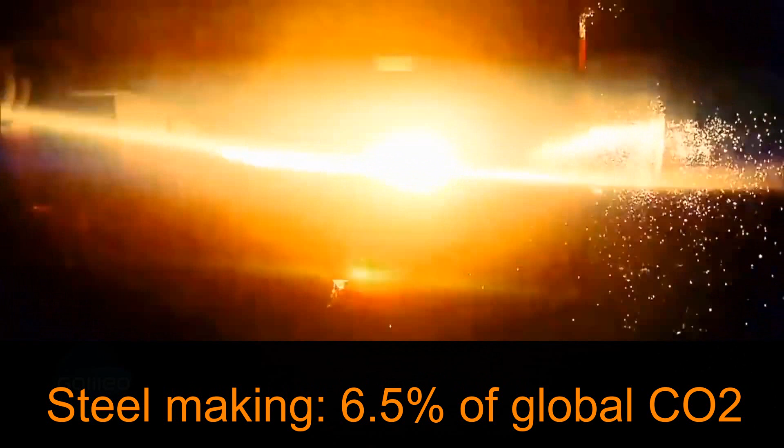Next we look into a few sustainability topics related to steels. With 1.85 billion tons produced per year, it is the most important material class in terms of volume and environmental impact. While steel is a sustainability enabler, for instance through lightweight design, magnetic devices, and efficient turbines, its primary production is not. Iron is reduced from its ore using carbon.

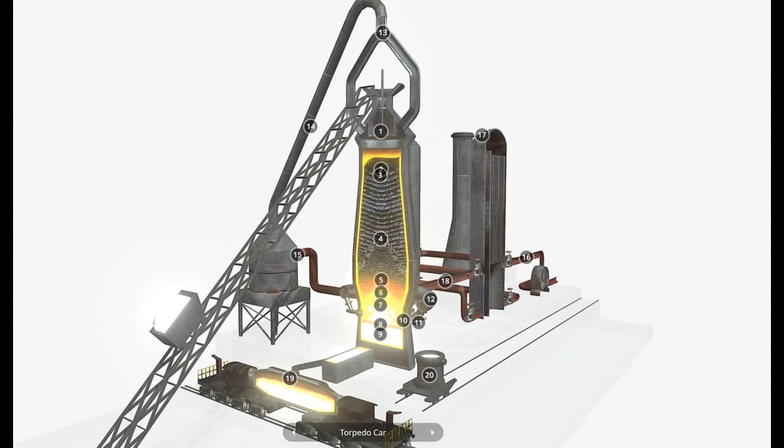Today 2.1 tons of CO2 are produced per ton of steel, causing 30% of the global CO2 emissions in the manufacturing sector, which translates to 6.5% of all CO2 emissions on the planet. This qualifies steels as the material group with the highest leverage for improvements in sustainability. Again, a full class about this topic will follow, and I give here only a few first glimpses.

Let us first take a look at the blast furnace and its impact on CO2 emissions. It is interesting to note that the carbon that finally produces the CO2 is not contained in the ore, but it is added to serve as a reductant. Its second role is to reduce the melting point of the iron in the blast furnace. Pure iron has a high melting point of about 1536 degrees centigrade.

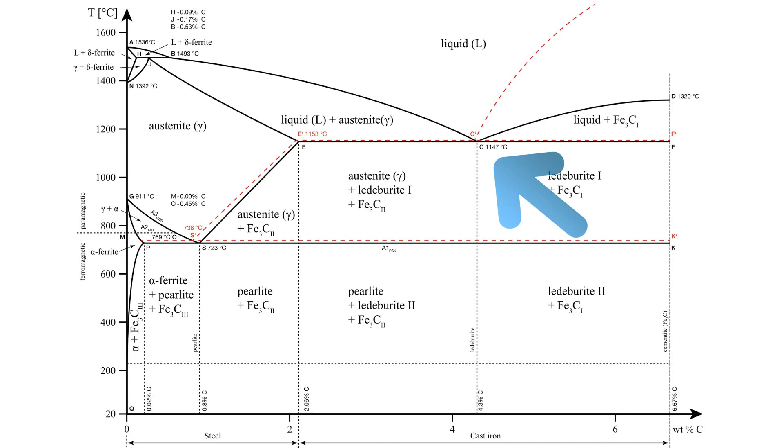The so-called pig iron, that is tapped from the blast furnace, is not pure iron, but a eutectic iron, 4.3% carbon alloy, which has a much lower melting point of only 1147 degrees centigrade. The problem is that this very high carbon content must later in the steel converter be removed again, producing lots of CO2. This shows that the cause for the staggering production of CO2 from conventional iron and steel making is the use of carbon as a reductant.

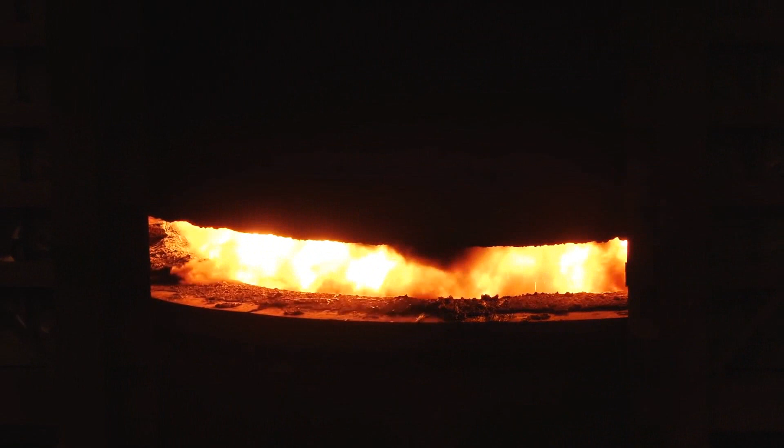One approach to mitigate greenhouse gas emissions from the blast furnace and converter lies in injecting hydrogen into the blast furnace. Currently, about 300 kilograms coke and 200 kilograms pulverized coal produce 1 ton of pig iron. The reaction product is CO2. When using hydrogen instead, water vapor is the reaction product.

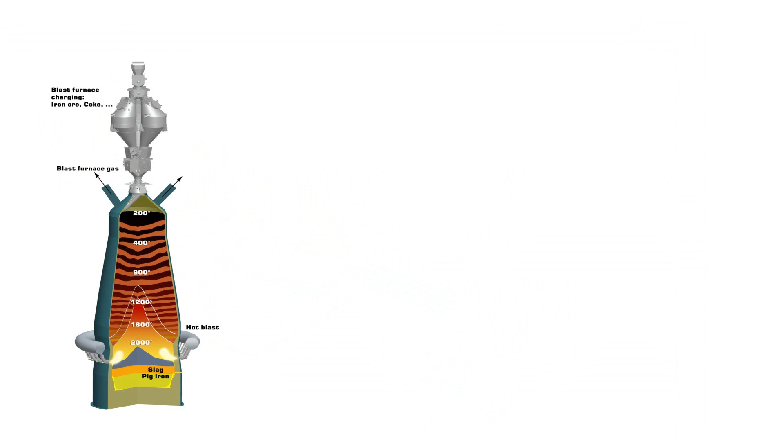However, in a blast furnace, coke is generally required to lend the furnace its permeable inner structure, allowing gas percolation, as well as slag and metal tapping. Therefore, in a blast furnace, only a fraction of the ore reduction can be achieved by hydrogen. Current pilot plants also use coke gas for this, as it can contain up to 65% hydrogen and more than 20% methane. Details of the interplay among carbon monoxide and hydrogen in the reduction reaction are currently under investigation, and will be discussed in a separate class.

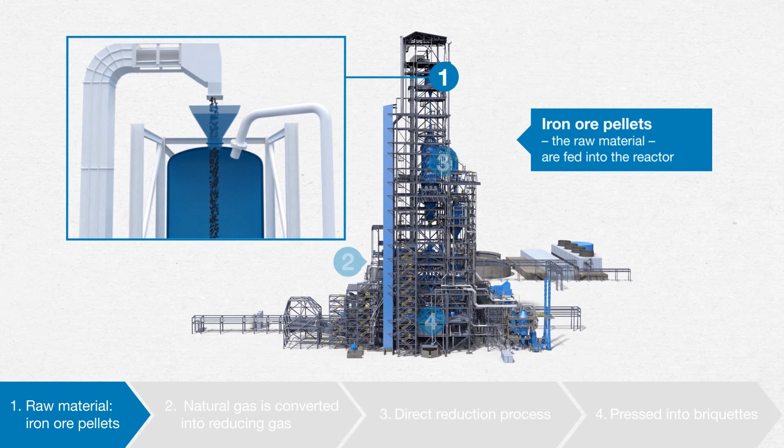A second method to reduce CO2 in iron making is the direct reduction method. In this approach, solid iron ore pellets are exposed to a reducing gas, usually methane, which reduces iron oxides to metallic iron at temperatures below the melting point of iron. The so reduced material is called sponge iron.

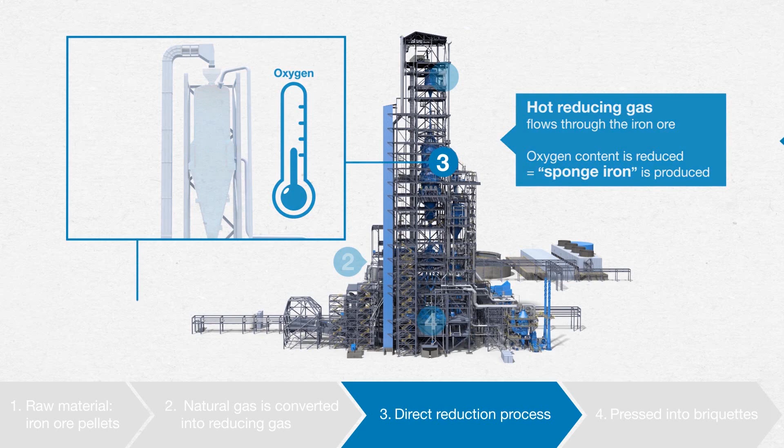It can be molten in electric arc furnaces instead of converters, because the sponge iron from direct reduction contains only negligible amounts of carbon. The direct reduction process is comparatively energy efficient. Like in the blast furnace, hydrogen can be used as reductant instead of a carbon carrier gas. The big advantage over the blast furnace is that even pure hydrogen can be used. For these reasons, hydrogen-based direct reduction furnaces are considered the next generation technology in clean iron making. A precondition for this is, of course, that green hydrogen is used for the reduction.

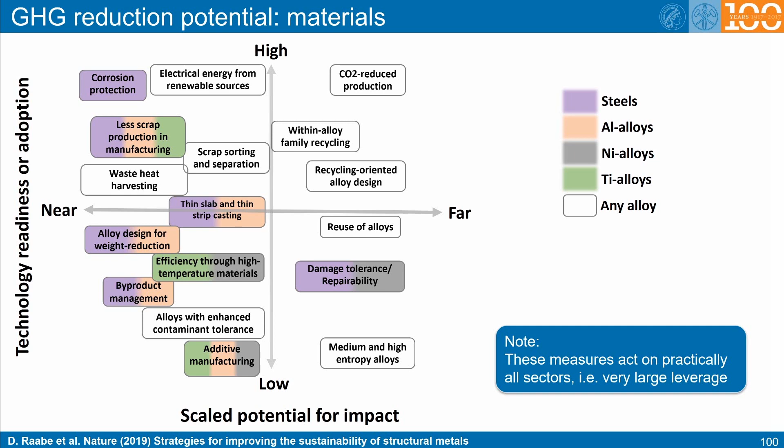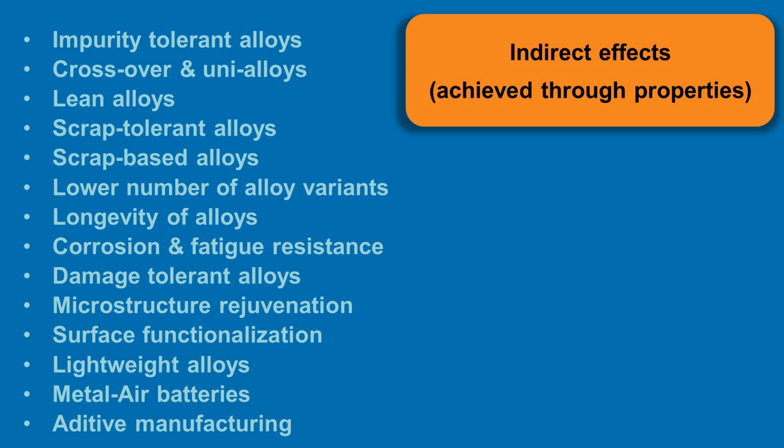The same applies for the indirect effects, where sustainability progress is achieved through the use of advanced materials. This list only shows a few examples, some of which are well known from textbooks, such as strong and lightweight metallic materials, while other ideas have been less studied, such as alloys that are specifically designed to reach their desired microstructures with short and low temperature heat treatments. The more you think about such opportunities, the more interesting materials problems you will find, that might help to improve the sustainability of materials.